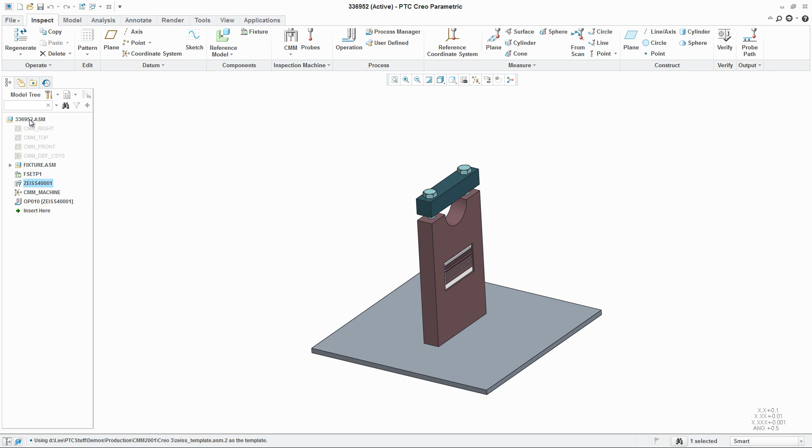So you can see I've got a plate laid out, and I've got my Zeiss CMM called out. But even though it's a .asm, you'll see I have an inspection ribbon with all of my various functions I need for measurements, construction, and verifying.

I can go look at my probes. You'll see here I've got a couple of default probes that come with the system. You have a single tip, you have a multi-tip. These are Creo solid models.

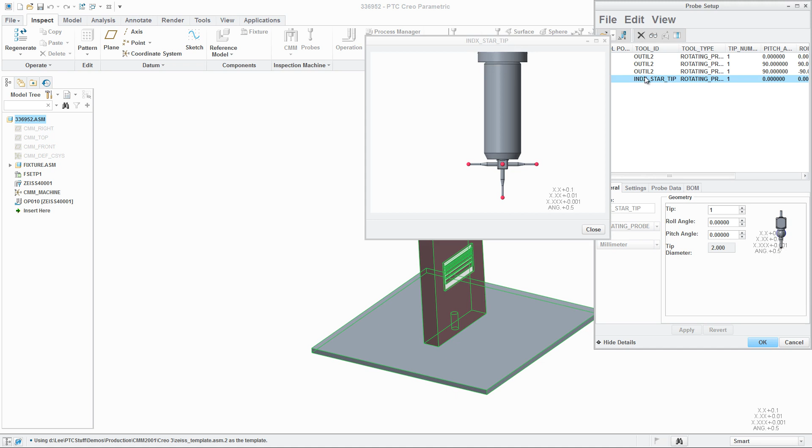You can also assign, in this case, this is an articulated probe, so I've got a roll and pitch. So these can be solids. You can take these, modify them, build your own, whatever you need to for tooling.

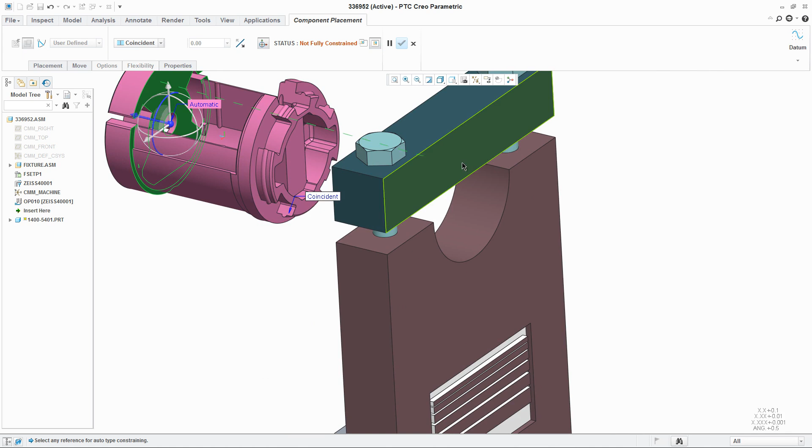All right, so I'm going to go ahead and assemble my part in. There's no translation, there's no changing formats. I use normal Creo assembly techniques to go ahead and place this exactly where I want in my holding fixture. Let me space it over there.

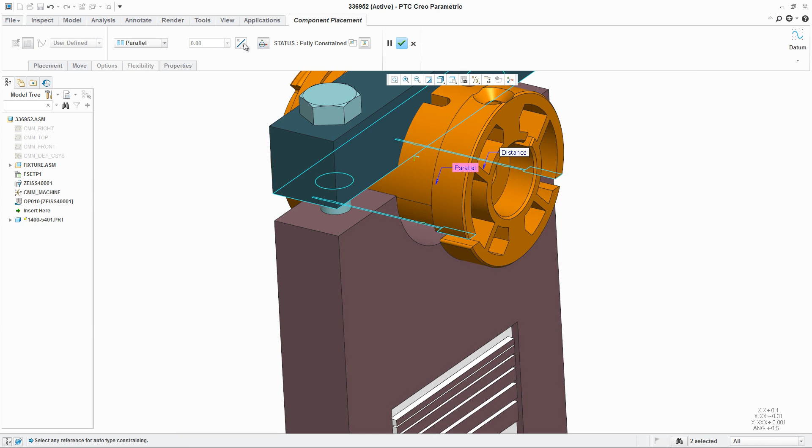Go ahead and flip this thing around so I've got the right orientation. But again, it's nothing different. I'm just assembling a Creo model into a Creo assembly. All the same techniques are used, and now I'm ready to go.

Now I've got a default coordinate system for my machines, kind of edge of the table or center of the table, something like that. I need to move my measurements locally, so let's go probe some points.

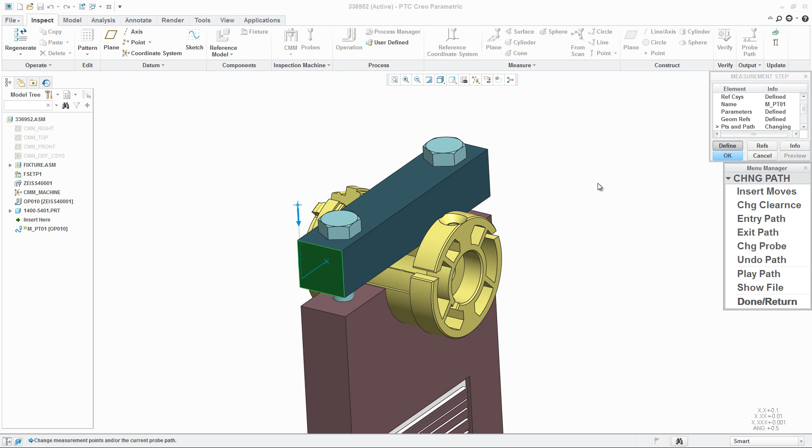I'm going to take just the single tip probe, and all I have to do is pick on, in this case, a surface, and it builds a construction point right where I pick and generates a probe. You'll see here's the DMIS file, it actually goes and does it. I'll just do that 3 times. Got X, this will do for Y. Let's do it again for Z.

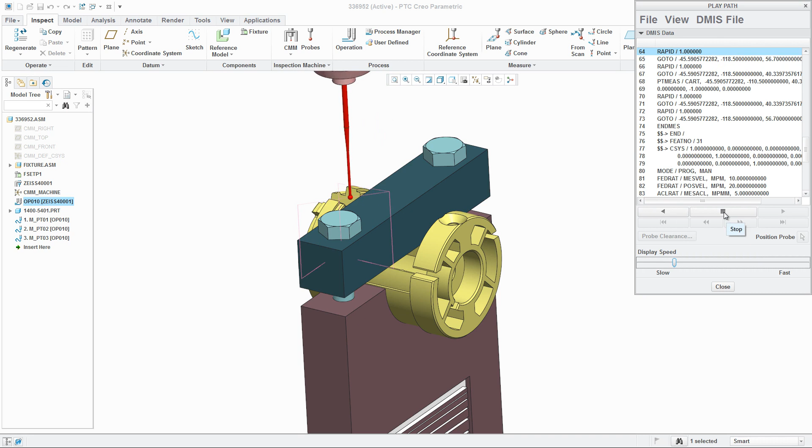Now as I do that, at any point, I can say, well, let's show my probing operation. There's my probing the 3 points. Let me slow that down a little bit. You'll see I've got controls for offset distance, for retract, lots of things set there.

Now that I've probed this face of these 3 faces, let's go ahead and reset XYZ 0. So if I say I want to connect them to things that I've probed, here are those datum points. Whenever I probe something, it constructs either a point or a surface on that feature. That allows me to now say, okay, now my reference coordinate system is right on the edge of the fixture. So from there, let's go measure the part.

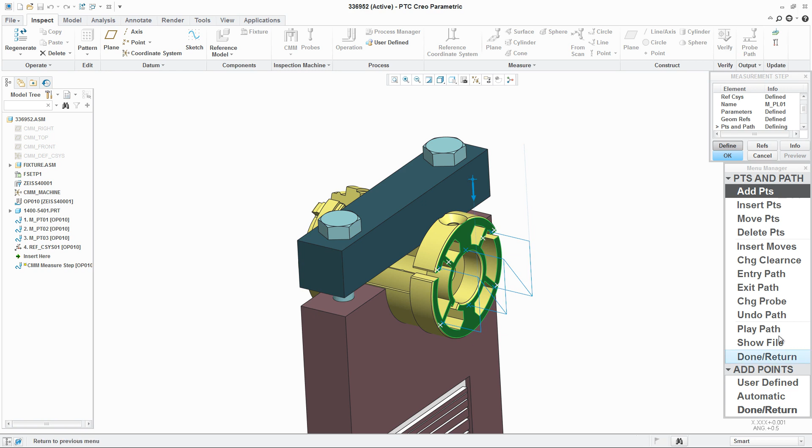So if I go in and say, let's measure a plane, all I have to do is pick on a planar surface on the part, and then I can have the system automatically build me a grid of points based on spacing and so forth. If I like that, play it. See, that looks good. Or I can change the order, change the number of points.

You know, really just need 3 to get a plane, so it's sort of a default, but you can get whatever level of detail you need. Now let's go ahead and do the same thing. Let's do this back plane. This time, let me just manually pick points.

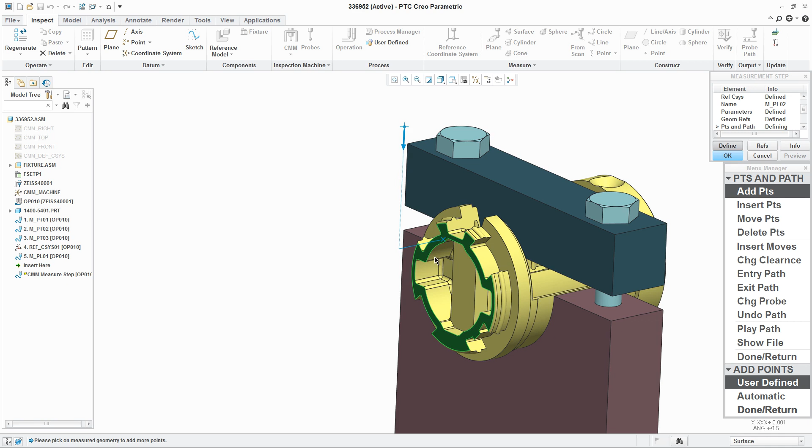So you'll see I can say, I want to probe here, here, here, and here. So it can be very automatic, it can be very manual. Really up to you as the quality engineer.

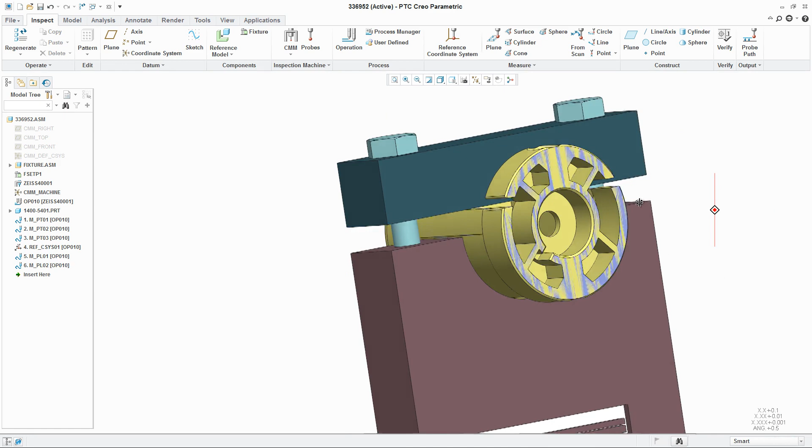How do you want to move this around? What do we need to clear? We'll talk about collisions and so forth here in just a second. But that looks pretty good. So now I've got 2 planar measurements made.

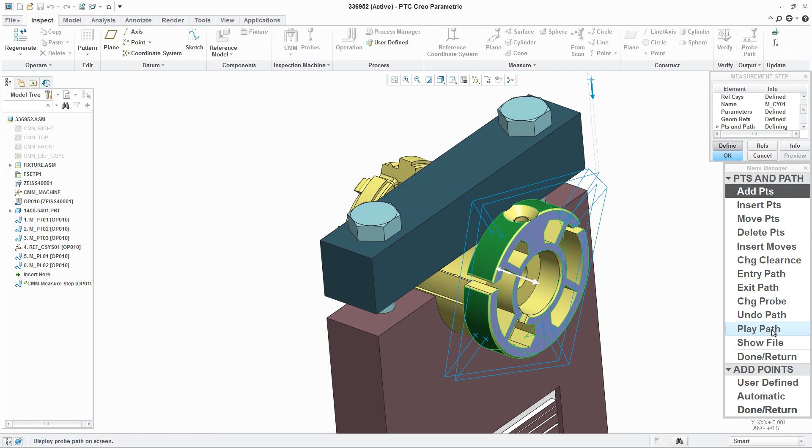Now let's go ahead, let's do some cylinders. So let's say I want to probe the outside of this part. Well, all I have to do is pick that outer surface, put some points on it, either automatically or I can do it myself. And now I've got a good set of probes.

So I can play it and watch it, but it's going to be a problem. Notice with this orientation, getting those probes, oops, I'm running into the part. So a couple of things I can do.

I can turn on collision, and it will do collision checking as it plays. In this case, the fix is pretty easy. Let's just get out our articulated probe, go ahead and roll it 90 degrees, then play that same path.

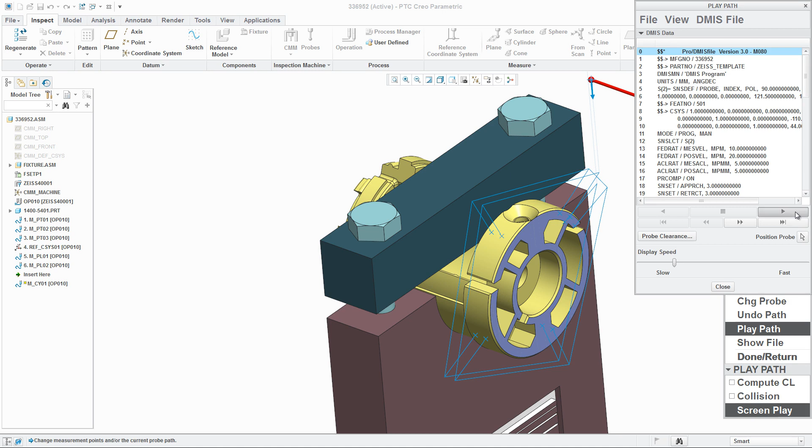And that looks like that may work a little bit better. So I can control it that way by simply picking the appropriate probe orientation that will allow me to do the task I need.

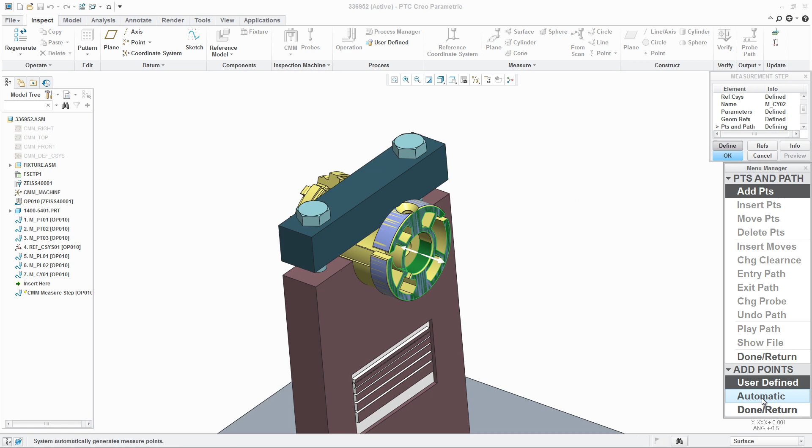Same sort of thing, let's probe this interior cylinder. Put some points on there, and so forth. Now this one, the probe's in the right orientation, it always remembers the last one. But look at that first move. So the actual probing is actually okay, it's moving around inside there, probing the ID, but entry-exit.

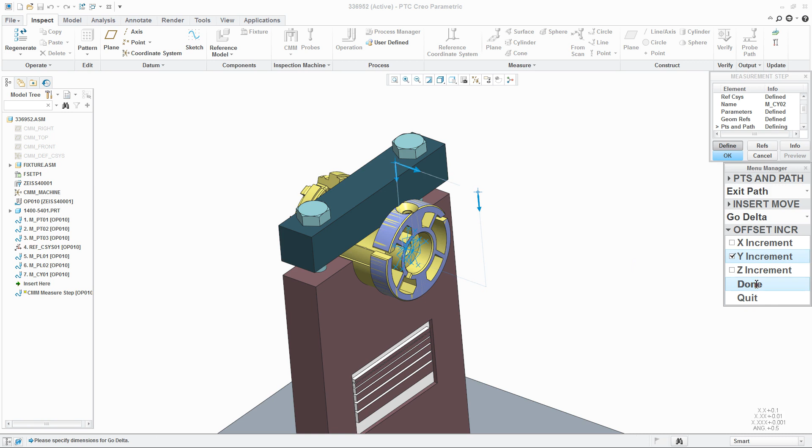As it starts, as it ends, we got a problem. It comes straight up to the clearance plane. So now let's actually add some motion. Let's say I want an entry path that starts an inch or so out. Same thing, I want an exit, come out an inch. So before and after you do this, let's move around. So again, that low-level sort of control. Say, yep, do this, but in this one, I need to get a little more control, a little extra detail. Let's go do that.

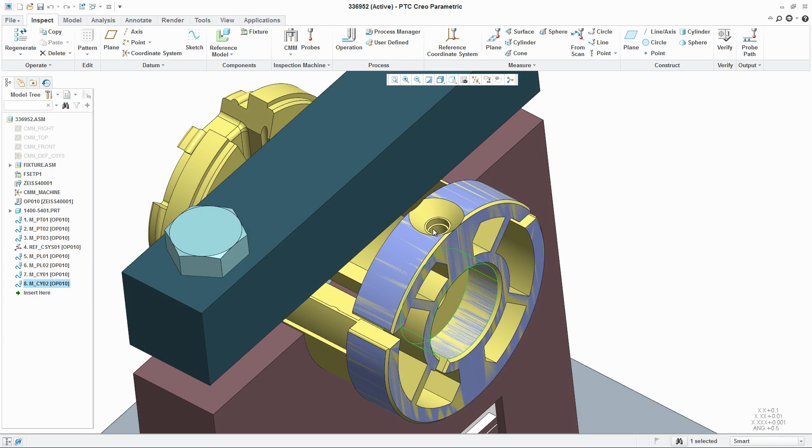So that looks good. Let's do one more feature, maybe this inner bore here. Let's say I want to probe that surface. So I'll show one other thing. If I automatically put my grid of points on there, so forth, now I just have a single layer, but obviously got to change to the vertical tip.

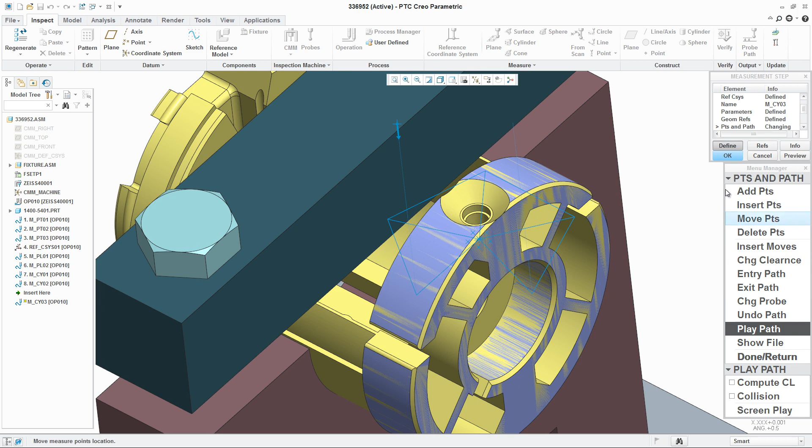But my default values aren't quite what I need. Notice what happens when I play this. My retract value, my measurement value, they're all too big. Well, those are parameters. They're very easily set as defaults, but in this case, I need to make a change.

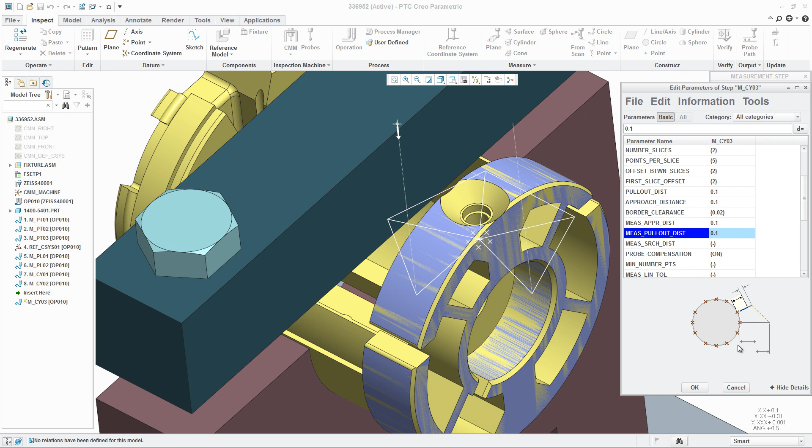So here you can see feed rates, acceleration rates, and now what I'm going to do is change some things like pull-out distance. So how far do I pull out once I've probed? So I'm going to set those to much smaller values. That'll allow me to actually go into this bore and move toward the wall to probe and move off of the wall, but in this case, very tiny amounts, because that's what I have room for.

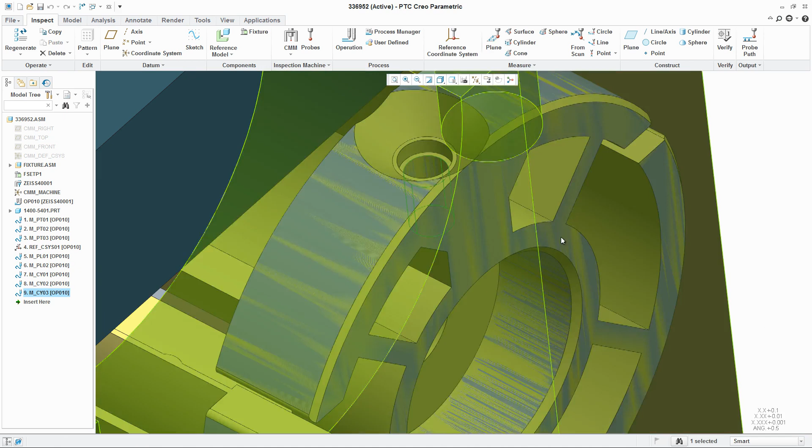Again, I can rerun that collision checking if I'm worried about it. As it is, nice little star pattern there. That looks pretty good. Also, if you looked at the real detail, it knows the ball size for the probe. That's a key piece of information. How are we probing it?

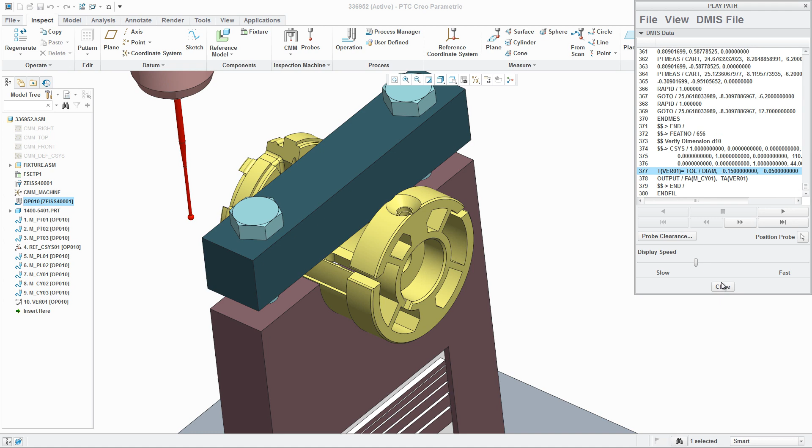All right, so once I've measured something, now I need to verify it. So here, if I pick on the OD, this right side, and then say compare that to this cylinder that we probed, you can see now at the end of the program, we get a verify statement. Verify that tolerance, it reads the tolerance. It understands what the diameter and the tolerance should be, and spits out a verify statement.

So maybe do the same sort of thing on the ID, this inner bore. Say match that dimension to this probed feature. Same thing with GD&T, so if I click on that again, say here's that concentricity. I want to compare that one to that one. All right, now I'm going to get a verify statement for that. So that's where you keep going.

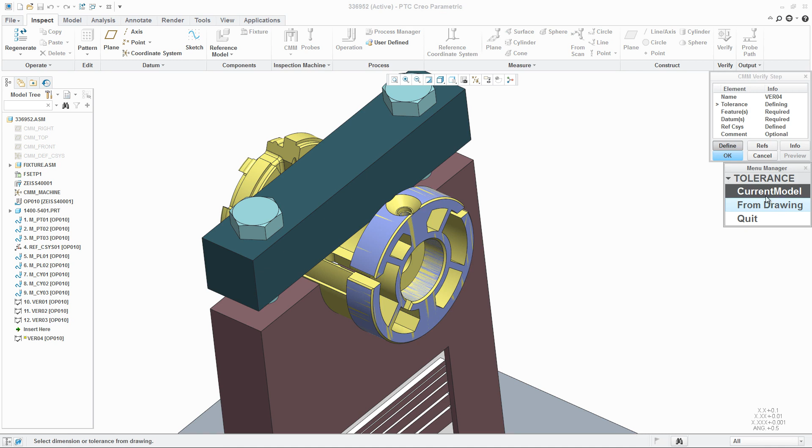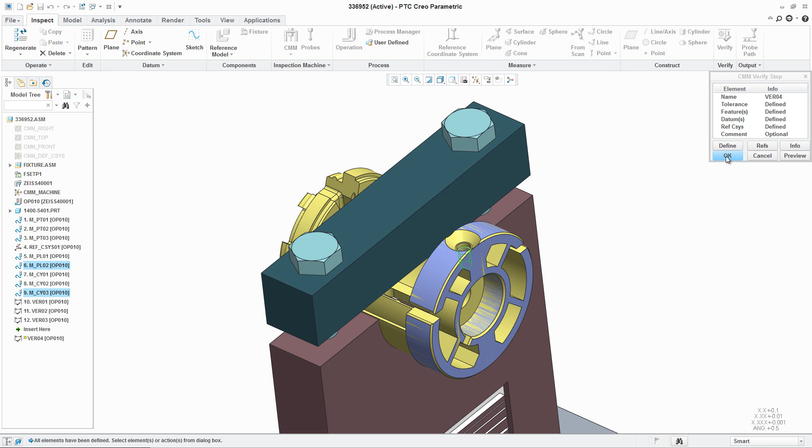Notice I picked on the model, but another option from drawing. So if you have a Creo drawing of this model, you can do exactly the same thing. It's strictly your preference. In this case, here's maybe the spacing from that bore to that back face. So I'll do just that. Go from here to there. And it's only letting me pick features that I have inspected. So kind of a little quality control of its own there, keeping track of all this.

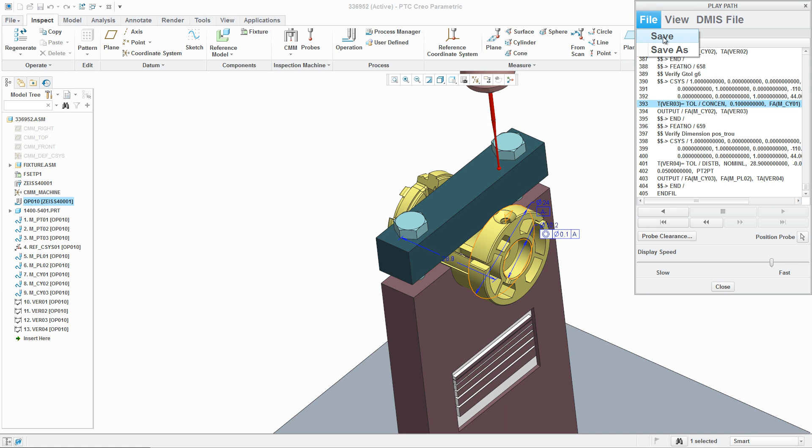Okay, so there's my probing, the various faces, the various cylinders, and then the DMIS commands. Verify this, verify the GTOL, put the tolerances in directly. I don't have to type those in, so there's never a typo. It uses the exact Creo model. And when you're done with it, file save. Now I have a DMIS formatted text file that I can send out to my CMM.

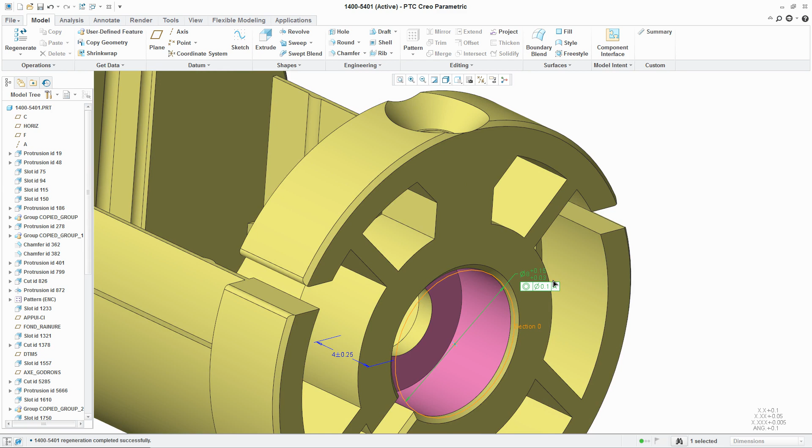Right? Of course, this is Creo, right? And what always happens when you're just about done with your work? Well, you get that phone call. You say, hey, wait, we changed this inner bore. Instead of 10.2, it's 8 millimeters. All right, so not a big deal. The big deals really come in, what if they change just the lower tolerance, the upper tolerance, and nobody even got notified of that? Well, that's where parts start to fail.

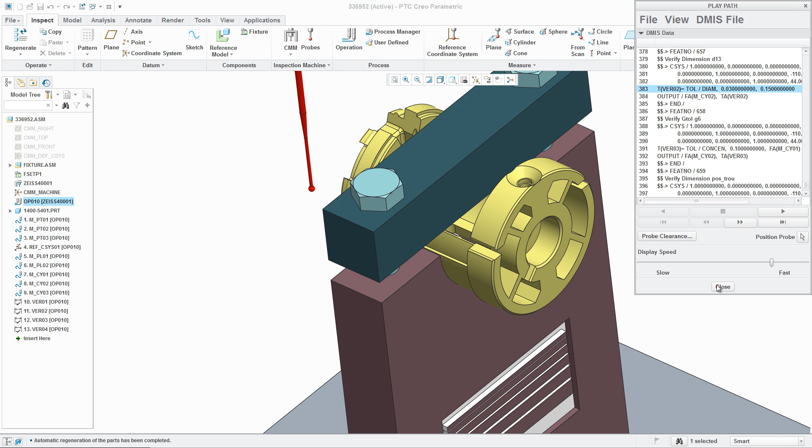But this is Creo, so if I go in and call up the model, regenerate it, it sees that new 8 millimeter bore. If I look at my code, look at my DMIS file, all the way down toward the end, you'll see, let me scroll up a little, there's my 030 instead of 050. It reads directly from the Creo model. That saves you time, saves you money. It really makes sure you're all working from the same playbook.